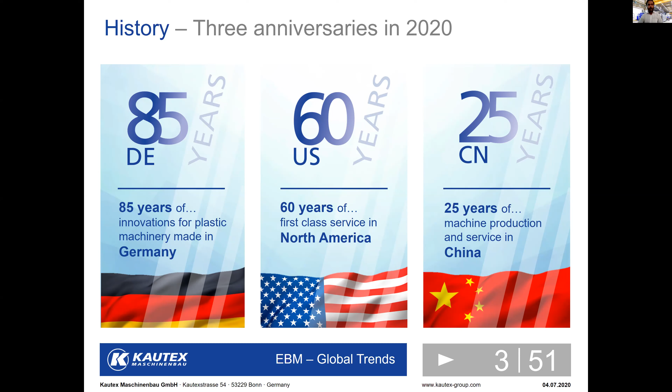The latest with Kautex is that now we are owned by a family called the Neumann family. This is also the same family which owns a lot of other plastic processing companies, including Engel injection molding machines.

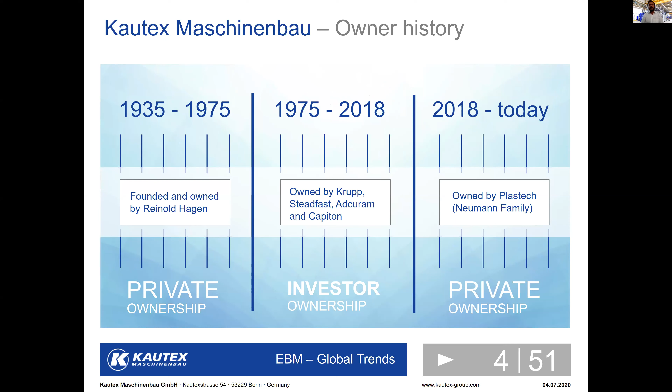In terms of presence, we are a German company based out of Bonn, with manufacturing facilities in Germany and China, plus subsidiaries all across. The slide you see right now only talks about the Kautex fully owned subsidiaries. In India, we are present since 2014, based out of Bangalore, and we take care of sales and service of machines for the Indian market, plus Sri Lanka and neighboring countries.

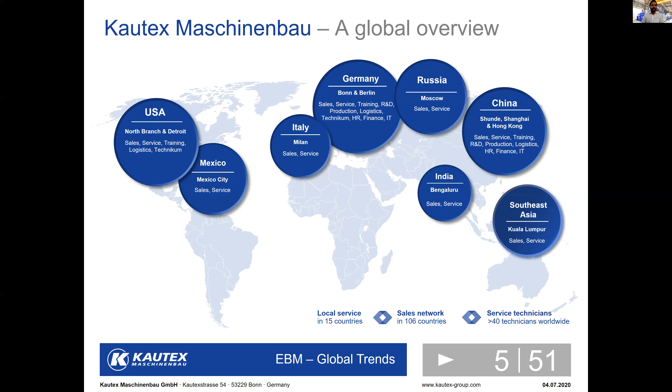So let's go to the main part of the presentation where we touch upon the different market applications. We have segmented the market into 4 major areas: packaging and non-packaging. In packaging, we have industrial and consumer packaging. Consumer packaging covers smaller products, let's say below 50 liters, while industrial packaging covers bigger items like L-ring drums and IBCs. For non-packaging applications, we have 2 segments: specialties and automotive.

Automotive used to be our bread and butter. We sold a lot of machines for plastic fuel tanks and other automotive parts. Specialties are the segments not really included in any of the other 3 segments, like composite cylinders, toys, and some special applications like garden houses and boats. These are segmented into the specialty business.

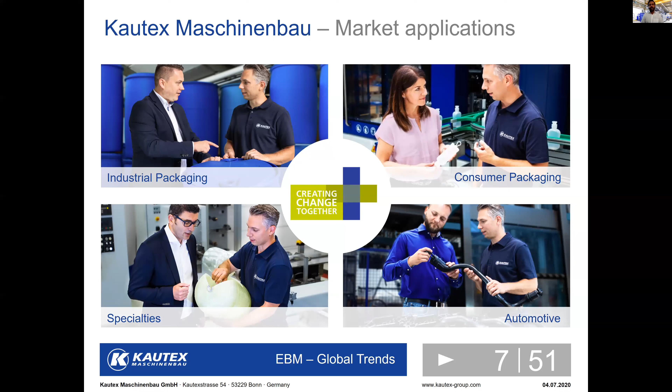So let's first touch upon the consumer packaging area. Like I mentioned, this is one of the fastest growing markets. Also, this is not a market mainly affected by the coronavirus and the downturn—this industry still continues to do good. The only problem we are facing with this industry in India is the shortage of manpower. But apart from that, the order books of most of these processing companies are full.

So the different sub-segments in this area would be packaging for detergents, the FMCG industry, lube oil, food, and pharmaceutical industries. And the main end users include Unilever, Reckitt Benckiser, Henkel.

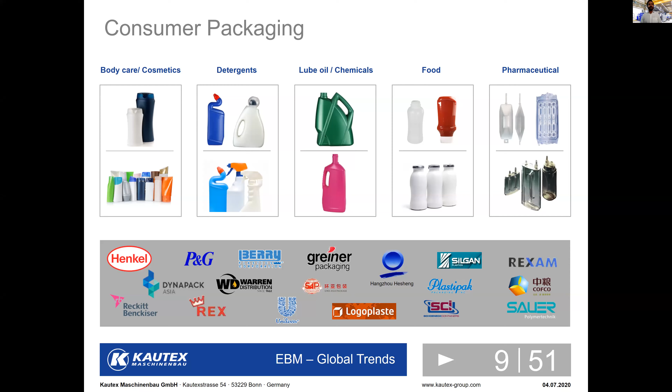So when it comes to packaging, what are the main drivers? The market is getting global. The number of SKUs is increasing each day—there's a 200 ml pack, there's a 250, 300, 400, n number of packs—the consumer is spoiled for choices.

The time to market is really short—the end user designs something and next day wants it in the market. There's a wide variety of product; even lube oil from Castrol itself has so many different variations, so it's really difficult, since all these SKUs have to differentiate one from the other.

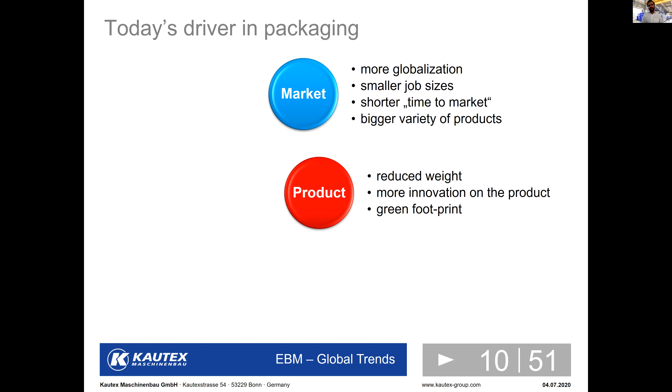If you look at the product in general, there is a demand for reducing the weight, and a demand for a greener footprint, reducing the carbon footprint.

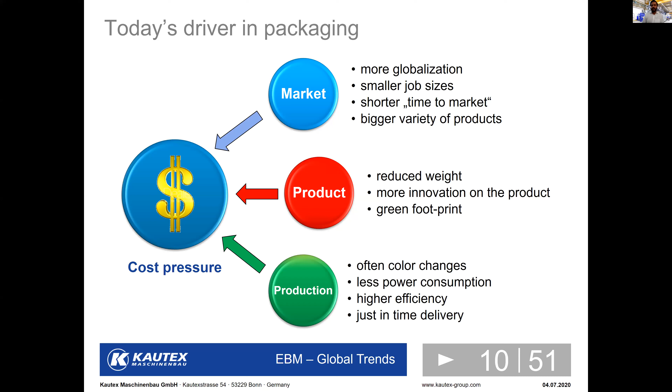And of course, when it comes to production, there are different challenges a processor faces: frequent color changes, energy consumption has to be less, the machine has to run 24 hours out of 24 hours, just-in-time delivery. So there is a lot of pressure on the processor because of these new challenges.

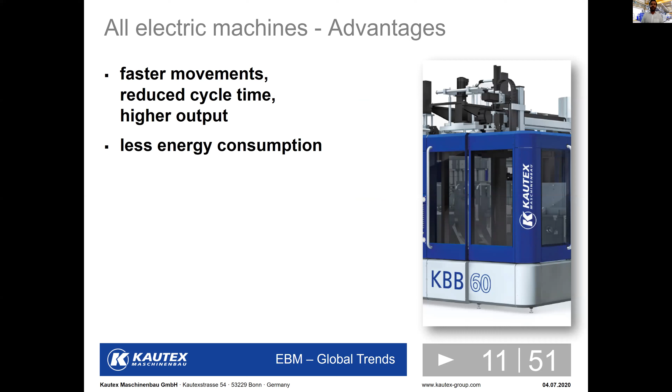So as a machine manufacturer, how do we address that? Of course, like in injection molding, extrusion blow molding is also moving gradually towards electric machines, which are faster, give you more precise movement, and higher output. The energy consumption is much lesser.

Repeatability is better because of more precise movements, and you can start up these machines faster. There is no waiting for hydraulic oil to warm up, you can just switch on the machine. And electric things, electric machines, electric cars, everything is cleaner than a hydraulic machine or similar product.

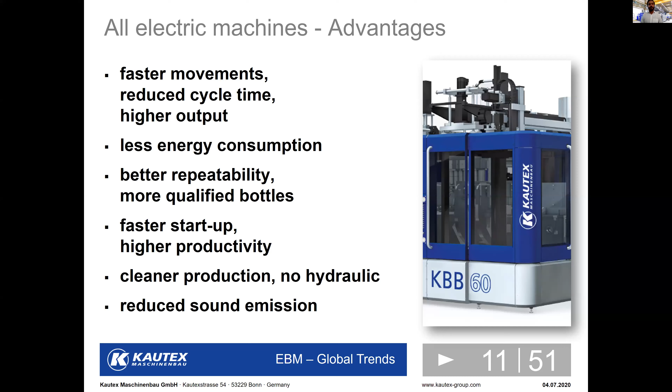And of course, you hardly hear these machines running. So if you talk about only the energy saving, just on the movement side, because if you look at things like heating, extruder running, irrespective of whether it's an electric or hydraulic machine, it consumes the same. It's only in the movement of these machines that electric machines save energy. What we see is, if you compare a new generation electric machine with a new generation hydraulic machine, we still see a 40 to 42% savings only on the movement of the machine.

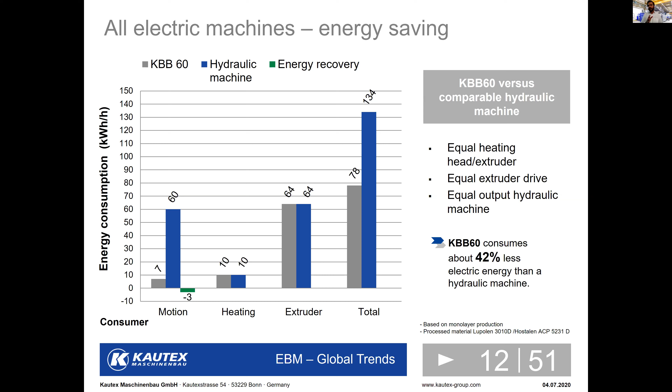But then, a good electric machine is only one part of it. It is not complete unless you have a good mold, a high quality mold.

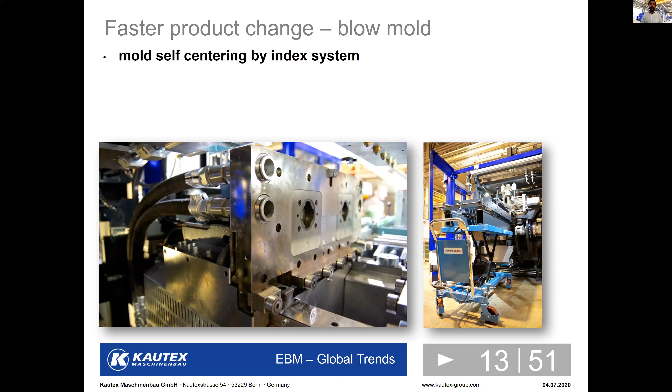Because of the flexibility you need, you really need faster mold changeover times. So we also have solutions wherein we can give you faster mold changeover times, mold changeover in less than 15 to 20 minutes. And if you are fully equipped, we can also target a mold change in 10 minutes. Mold change with quick connect couplings, blow pins with quick connect couplings, head changeover - because it does not make sense to have two machines for two different products if you can accommodate everything in one single machine by changing the head. So customers are also looking at this kind of flexibility wherein they have one machine and different kinds of heads, like different kinds of molds.

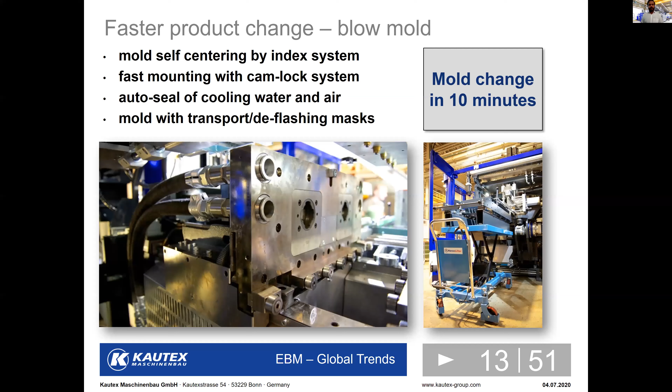That's one part. Now we have to look at the downstream. The major problem that processing companies are facing right now is the lack of manpower, so automation is something we really have to look at eagerly.

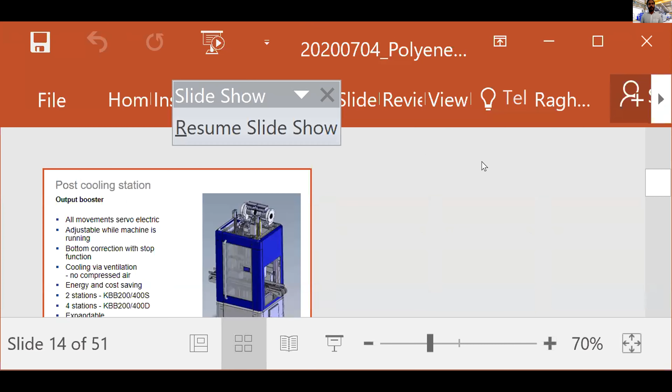Sorry, is my screen visible? Yes, yes, okay. I got a message that the screen sharing is paused, so I was wondering. The letters are actually small. Pardon me? The letters are small, and your screen is not in slideshow mode. Probably you have to put it in a slideshow to move forward. Okay, let me check that. Do you see the screen now? Now it's okay. Oh, okay, perfect.

Good, so I was talking about the downstream equipment along with the machine - it's also very important. One of the major time-consuming factors when it comes to blow molding or injection molding is the cooling. This directly affects the cycle time. But if you're talking about jerry cans and similar products, these can also be cooled outside the machine - you don't really have to use machine time for cooling.

So post-cooling stations are now getting integrated with the machine - you have the possibility of integrating it with the machine. At the same time, these are also plug and play systems, so you can use it for one machine, and if you don't need it on that machine, you can just slide it and fix it on the next machine. You can also use it for bottom correction, which is very critical for stackable jerry cans. This can be used for double station or single station machines based on your machine output, and you can increase the number based on what the output of the machine is.

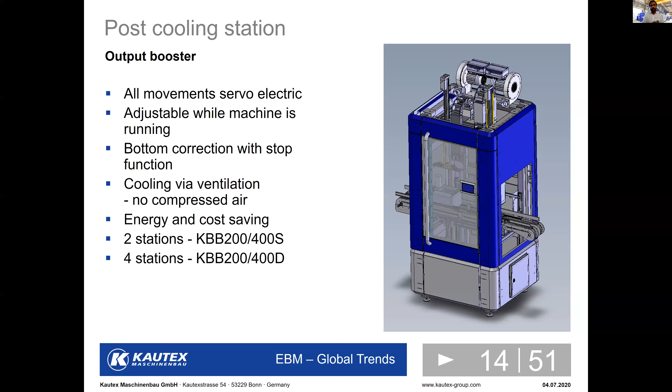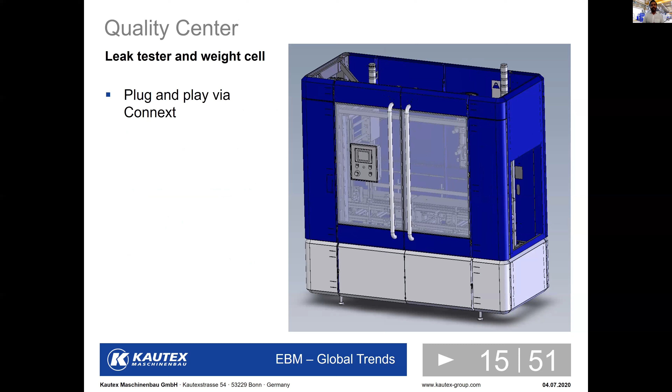Next is the quality center. You have to make sure that the bottles coming out of the machine are 100% tested. So what we have is a leak tester integrated with a weighing machine, which can be directly controlled by the machine control panel. The parts which are in tolerance are pushed onto the next station, whereas parts which are out of tolerance are removed then and there.

Another thing is post labeling - you cannot have manual labor just checking if each and every label is clearly placed, if the neck dimensions are fine, if the ovality is fine. So we can also have a Spotwatcher, wherein we have different cameras or a single camera which can move around the part and take pictures and images to check if the entire product is within tolerance as defined by the end user.

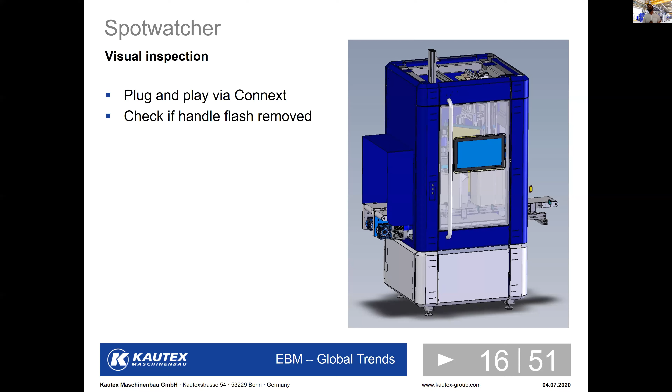So with these plug and play downstream equipments, we are totally removing any kind of manual intervention. This can go on up to fully packing - you can have a separate packaging line, so there is no manual intervention anywhere. And we have seen, with a single operator, you can run 4 to 5 machines on the shop floor.

So that's on the machinery part of it. Now let's talk about the processing aspect.

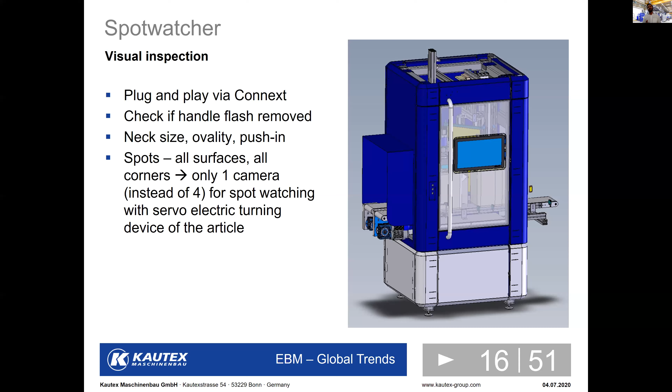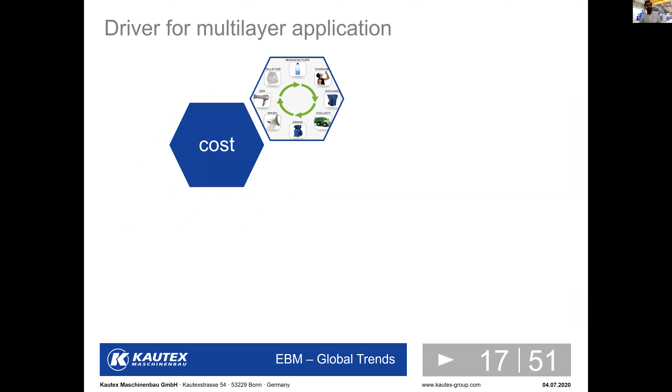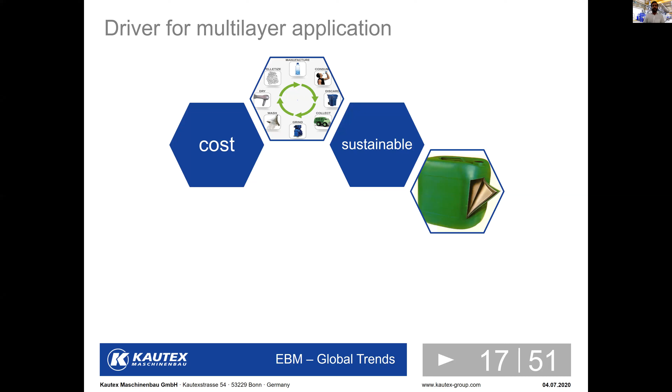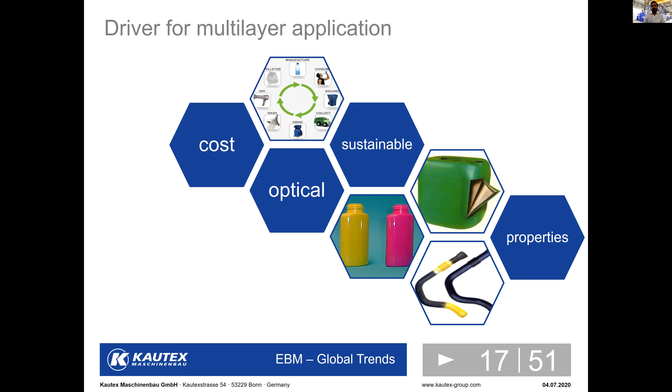In the processing aspect also, we have new technologies evolving. Multi-layer is something which was there in the market since long, and now it's slowly getting more and more acceptance because it's saving cost, it's sustainable, it improves the properties of your product. At the same time, it also improves the visual appearance and feel of the product. So I just want to touch upon these aspects, how we are able to do this, and of course the barrier properties also.

So your product, which is inside, let's say milk or any colored fluid, is not really affected by the master batch that we are using. You have the middle layer where you use the regrind, and you have the outermost layer where you're just adding the master batch.

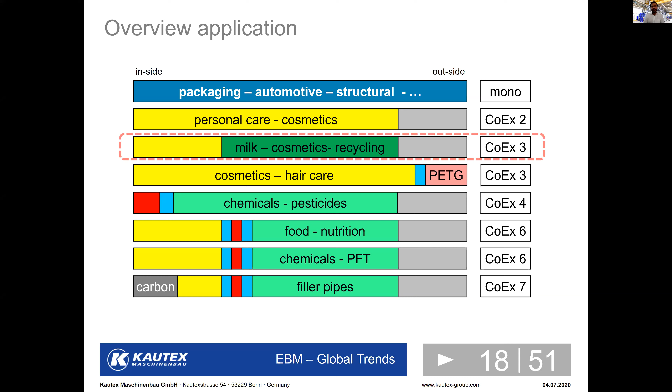So here in the middle layer, like I mentioned, you can either use your PCR material, which is gaining more and more prominence right now. A lot of companies are investing heavily in this PCR to make the bottle more green and to improve the UV properties. There's another added advantage that we can use this middle layer for something called foaming, which is chemical foaming or physical foaming. The main target is to reduce the weight here.

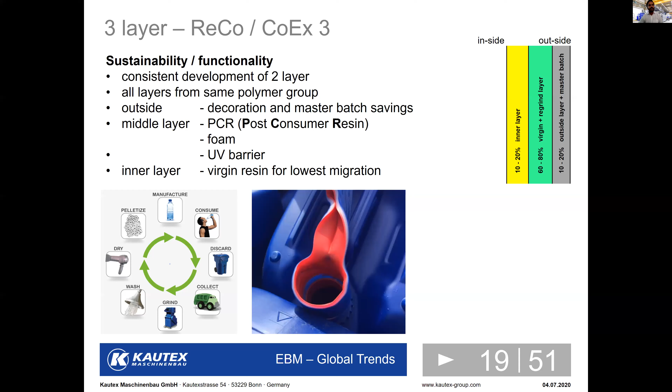An example - let's look at a three-layer milk bottle, wherein the outside layer is HDPE plus white master batch, the middle layer is HDPE with carbon for UV protection, and the innermost layer is your virgin HDPE, which has the lowest migration.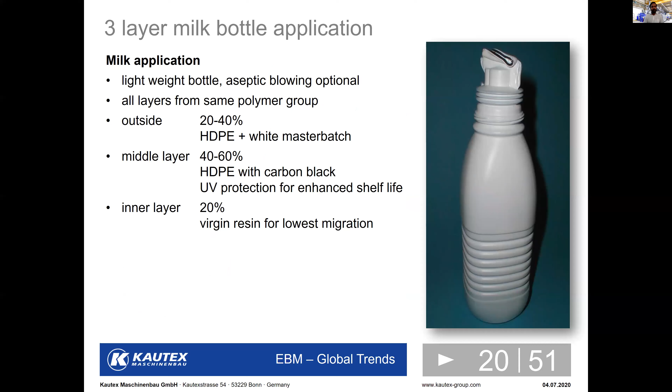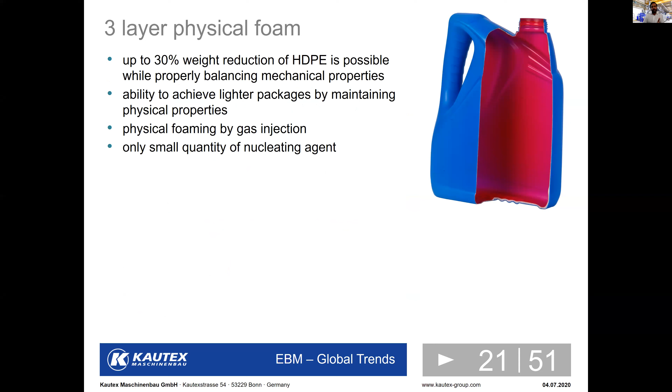If you look at the foaming structure, physical foaming is something which is getting more and more prominence nowadays, wherein we use the middle structure for foaming. In this case, what we use is a nucleating agent and a gas, which is either carbon dioxide or nitrogen. We pump this into the middle layer and create a foam-like structure. The main advantage here is that you have a possibility of reducing the weight of the product without actually impacting the physical properties, or you can keep the same weight with better physical properties, with better top load and all. So this is something definitely gaining more and more traction in the market.

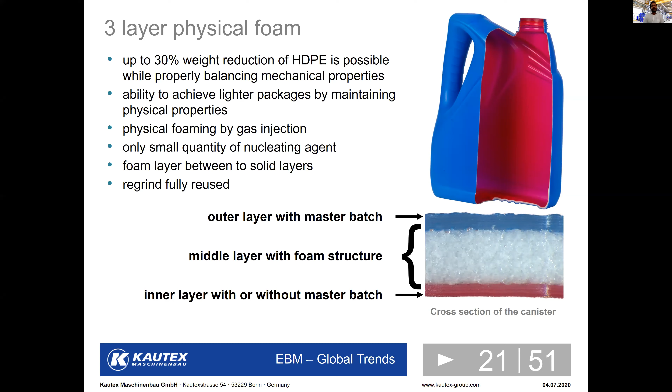Now, next, with the 3-layer structure, what we see is the savings that the processor has. So let's give an example of a 20-liter jerry can, whose gross weight - that is the weight including flash, everything - is around 1.2 kg. We have a cycle time of around 30 seconds and an output of 151 kg.

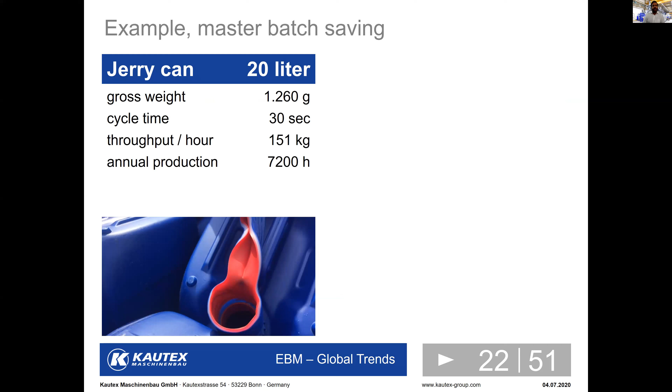Now, if we're using a master batch here, let's compare it from a mono layer to a 3-layer. In a 3-layer structure, we are only using master batch in the outermost layer, that is 20% of your thickness. So master batch consumption is only 1.5% in mono layer, but it increases to 3%. It's only a percentage increase, because instead of coloring the entire thickness, you're only coloring a small portion. So you have to put an extra dosage of master batch percentage-wise, but the actual consumption of master batch is much lesser.

This figure varies from processor to processor depending upon the cost of master batch you're using and the kind of product you're manufacturing. But if you take an example of a master batch which costs around €6, which is a fairly high quality master batch, you can easily be looking at a cost saving of around 50,000 to 60,000 euros in a year by moving to a 3-layer structure.

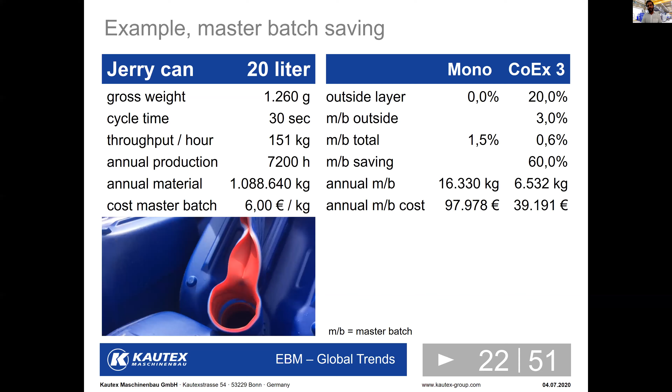We also have to make sure the machine is actually running at full efficiency, with no downtime when it comes to color change or head change. That's an area Kautex is investing heavily in, with a lot of R&D happening right now. Faster color change with our new generation head has been successfully achieved.

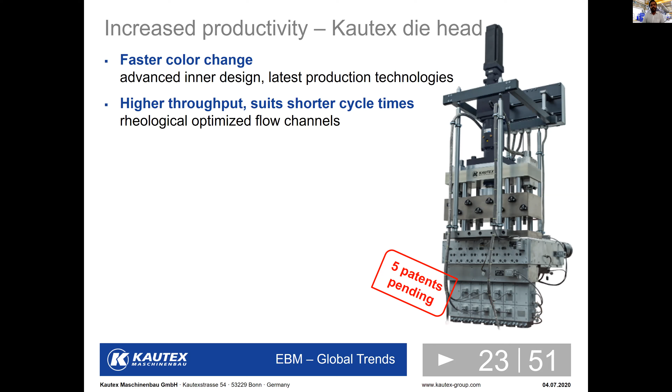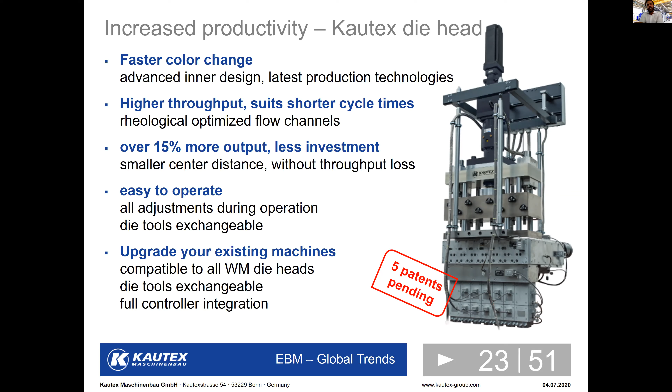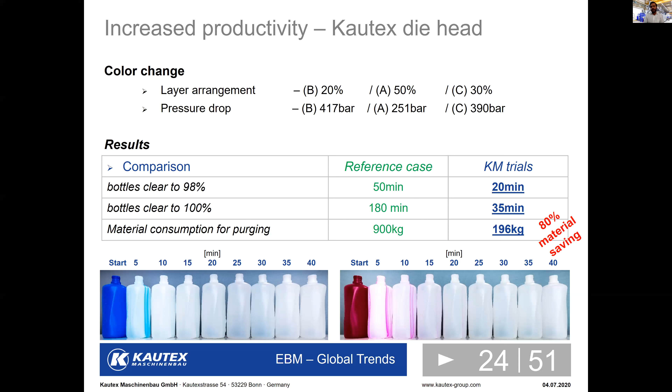More and more plastics being used, people want to try these green plastics made from non-petroleum sources. That's gaining more and more acceptance in the market. A lot of end users are trying to project themselves as more green by using these green polymers. These are slightly more expensive compared to standard plastic, but the processors, end users, and material manufacturers are working out how to make this PCR more affordable and how to make these bottles more green.

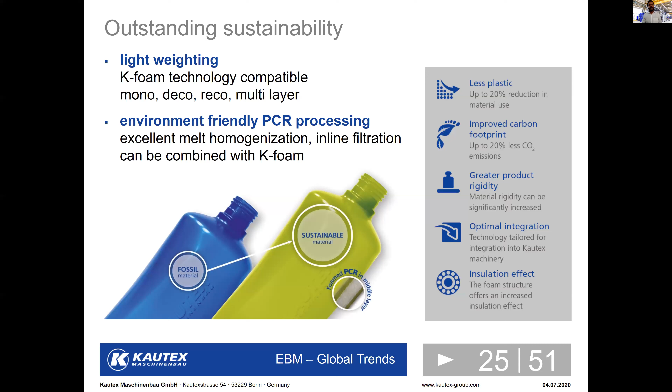There is a major impact of IT and communication on these machines. We have to make sure the machines are running, with no downtime, online all the time, so we can actually give recommendations on when you need to do any modifications, or if there are any spare parts which you need to keep in stock.

At the same time, you have something called virtual machines, wherein you don't have to stop the machine for any kind of training. You have these virtual machines with the same HMI as the machine, but the machine image is projected on a wall or screen, and you can actually do all the parameter settings. This lets you see if the machine is working well, or if there are any shorts, issues, or processing problems, so you can get a feel of all these aspects.

Whenever you get a machine first, it's always better to have your team spend some time on this HMI so they know what they're going to get and how the functions work, because each manufacturer has their own HMI. The basic logic is the same, but it always takes some time to get acquainted with the product.

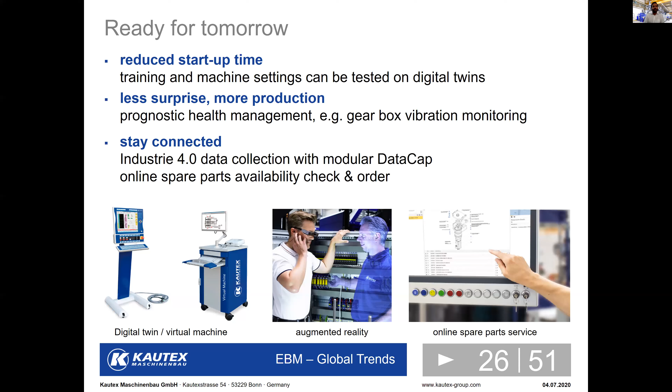The second aspect of packaging we'd like to touch upon is industrial packaging. Generally, what we mentioned for consumer packaging is more or less also applicable for the industrial packaging segment. So when I say industrial packaging, we're looking at stackable jerry cans, bigger jerry cans, polycarbonate bottles, L-ring drums, and IBCs.

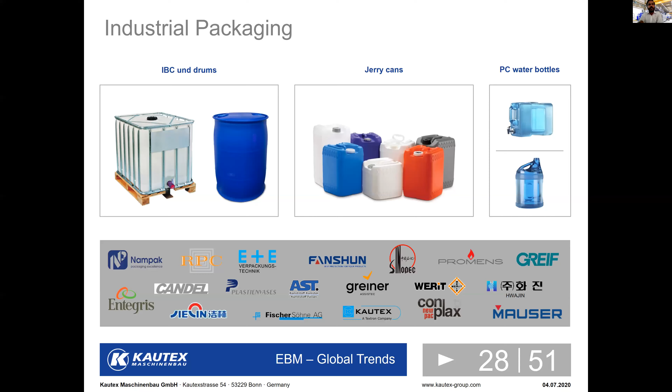Let's take an example of the L-ring drum. We have a lot of machines working in India and across the world for L-ring drums. If I take a standard case, a UN approved L-ring drum of around 8.5 kg, we used to get an output of around 20 plus drums an hour. But now, with constant demand from the market for high output and constant reworking on the machine, we're now confident of producing around 53 drums an hour at 8.5 kg weight. If you reduce the weight, the output varies.

If you're increasing the weight, the output goes down. This is achieved by having machines with lower dry cycle time and a head that gives very high output. Interestingly, we're moving away from accumulator technology and going more with continuous extrusion, which also means a lot of power savings on the machine compared to accumulator technology.

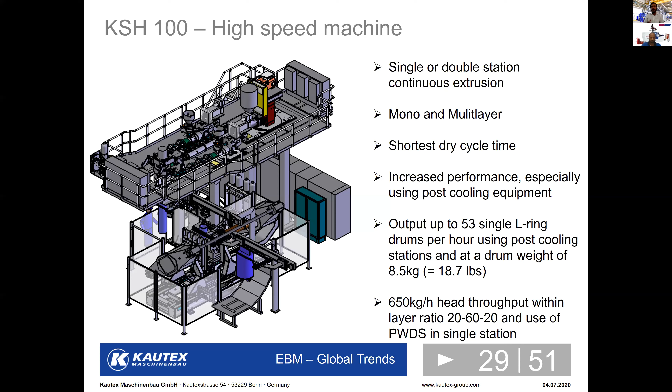Here also we are looking at different kinds of configurations, whereas we have a monolayer machine. This can also be 2-layer, 3-layer, or beyond that. But what we see is the market requires more of a 3-layer structure when it comes to L-ring drums.

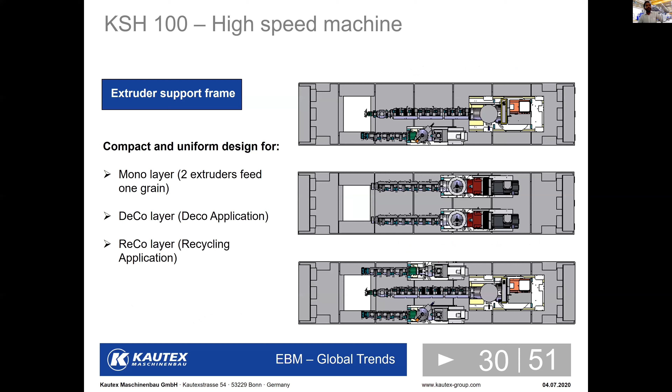So like I mentioned, the head is very important here when it comes to continuous extrusion. And with our new generation head, we are looking at an output of around 650 kg per hour in mono or 3-layer applications.

And the color change-over time is also very critical. What we are looking at is around 2 hours to change, in this case for the bigger machines, from one color to another.

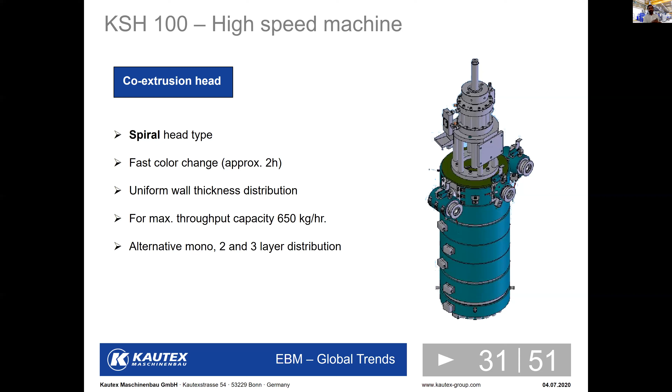A lot of downstream equipment is also needed here. So one of the critical points we would like to highlight is the plasma technology, wherein we give a coating of plasma on the inner layer, basically to improve the barrier properties.

So this was something which was already used in the PET market, but for the first time, since last K, it's also getting used in the extrusion blow molding segment. So plasma coating is coming up as a big alternative for multi-layer structures.

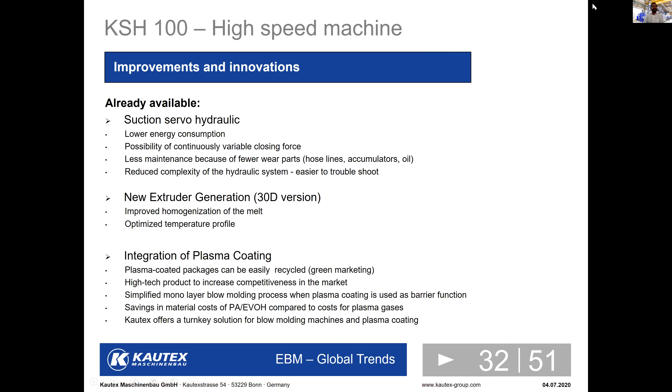We don't want to use the machine for cooling the product, because the machine is there to produce the product, and cooling can be done using the post cooling stations.

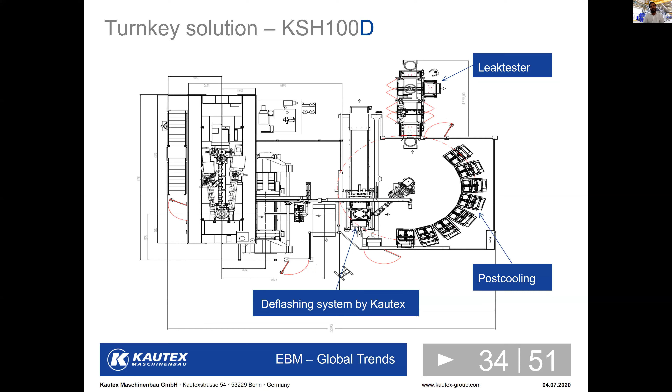Now, if you're looking at a double station machine, for customers who need even further output, we also have the possibility of making it a double station machine to further increase output. Accordingly, all your features like the post cooling station, leak testing, and deflashing station will have to be modified. But if you're looking at really high output, then that is also practical right now.

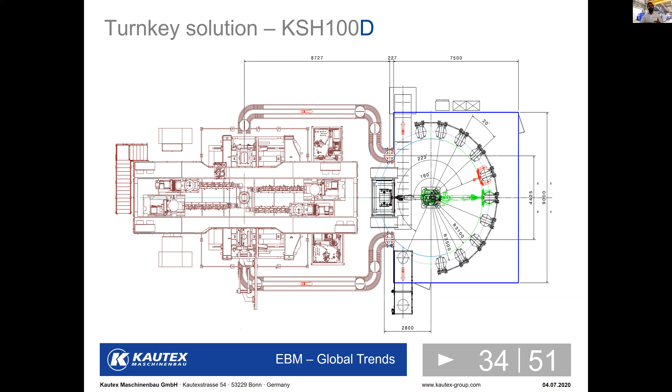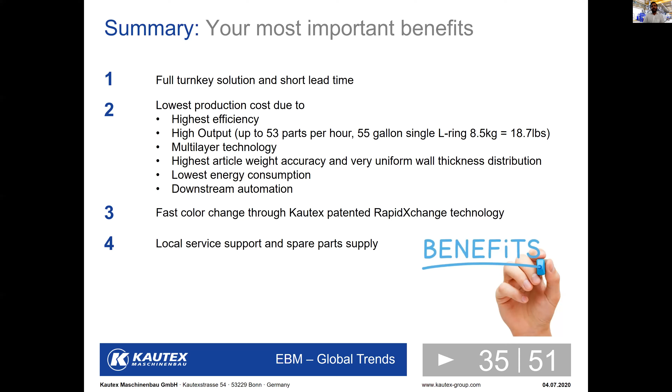So to summarize for these big machines, what we are looking at is very high efficiency, high output, different kinds of layer configurations—so multi-layer—and high article weight accuracy. At the same time, as we are moving towards direct extrusion, we are also looking at low energy consumption and downstream automation. So the last two segments we have here are automotive and specialties.

I would just briefly touch upon these two segments. So when I say automotive, there are two sub-segments. Let's say in automotive, we have the motor management functional components, that is the non-fuel parts, and then we have the fuel parts.

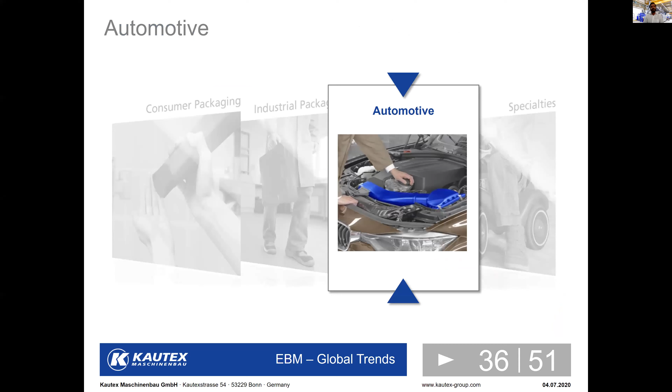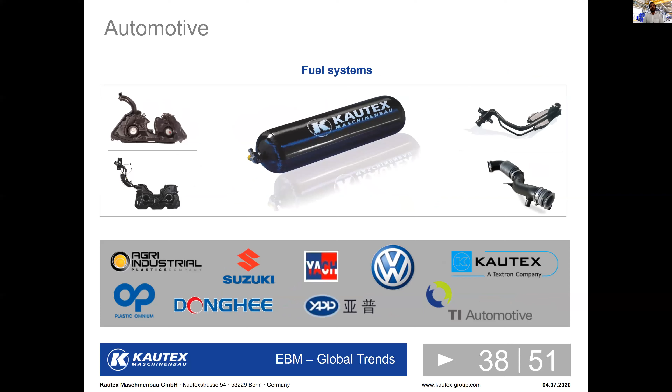The fuel systems include your petrol tank, diesel tanks, your CNG tanks, and your filler pipes—that is the connection between the petrol tank and your fuel inlet. So what we see here is a trend towards...

use of blow molding for type 4 applications. So when I say type 4 applications, we have a plastic core which is wrapped using fiberglass or carbon fiber. In this case, what we see is CNG as a typical example, wherein we have this HDPE core.

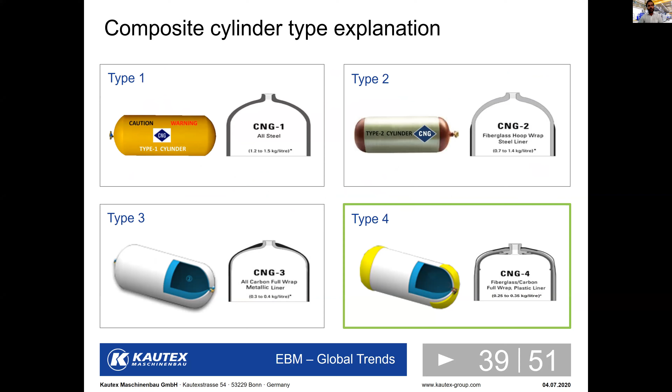A blow molded HDPE part, and you have a carbon fiber filament winding which gives the strength to the part. And with this product, we are actually achieving a burst pressure of around 700 bar.

And the test pressure is usually around 500 bar. If you look at the working pressure, this is around 250 bar. So this kind of high pressure requirement is now met by this product called CPV, which is called composite pressure vessels.

This is getting more and more acceptance because now mobility is moving towards electric, but at the same time, there are also a lot of companies and end users who are looking at CNG for their bigger vehicles, and they are looking at hydrogen for their smaller passenger vehicles.

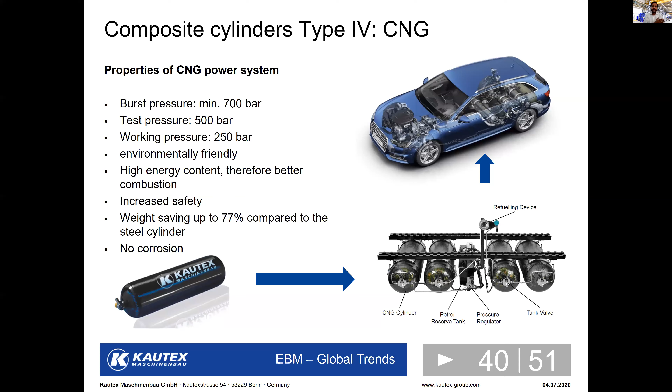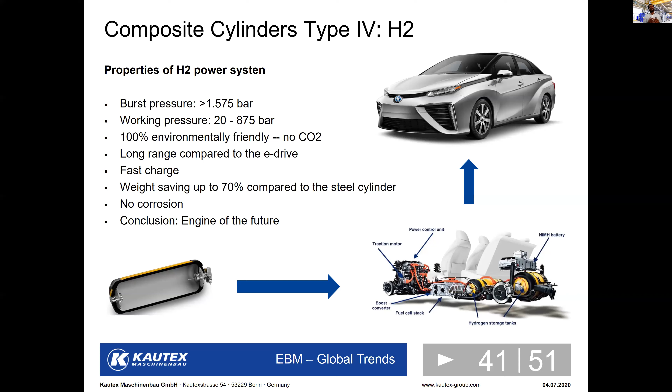The main advantage with these products is, of course, the life. We don't have problems like corrosion, and at the same time, you're looking at a much lower weight compared to steel cylinders.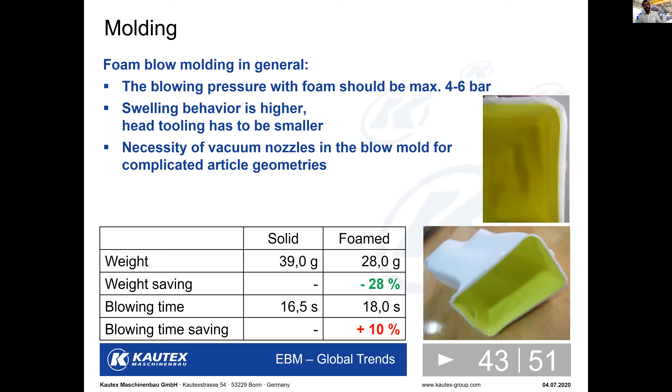The last segment I'd like to touch upon is specialties. Here we have products like pallets, garden houses, composite cylinders, big parts like kayaks almost 4 meters in length, which are now getting blow molded. So a lot of complicated products which were initially roto molded are moving towards blow molding as the consumption or output requirements are increasing.

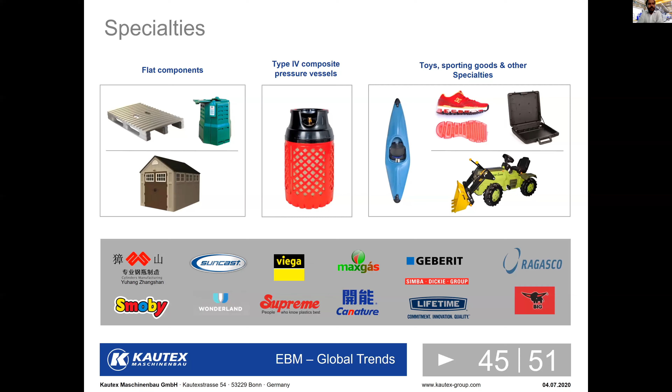Also products like shoe soles and toys are getting blow molded now. If you look at the LPG cylinder, which is also present in the Indian market but in comparatively lower numbers, this is also blow molded. The same concept mentioned for CNG and hydrogen cylinders is used for LPG. The advantages are that the weight of these cylinders is much lesser, they're easy to handle, and the life, because there is no corrosion, is much longer compared to a steel cylinder.

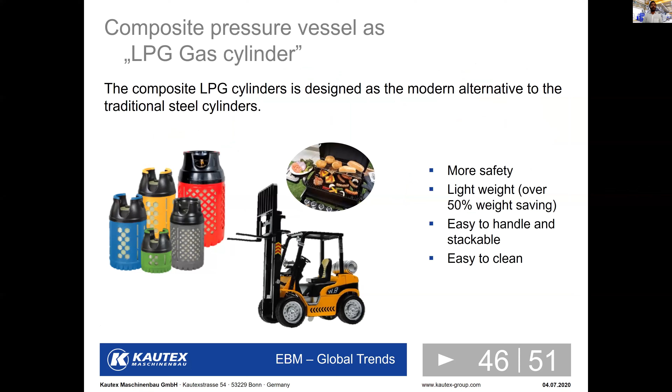If you look at the components of a composite pressure vessel, we have the polymer, the parts that have to be welded, and the fiber. In this case, we make the blow molded part out of HDPE. We use filament winding technology for winding the fiber across the part, and this entire assembly goes into an injection molded case, mainly for aesthetics and handling purposes.

So basically this is what we are doing in different segments of the market.

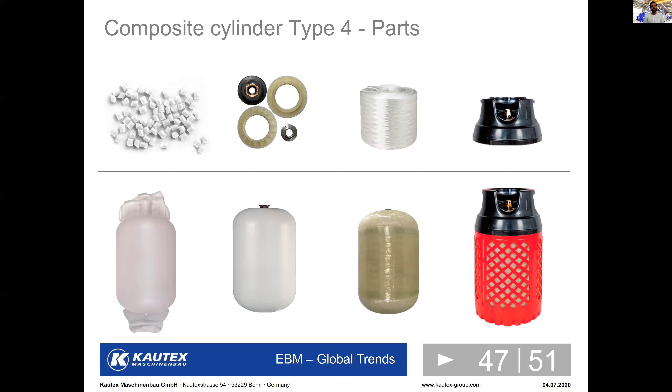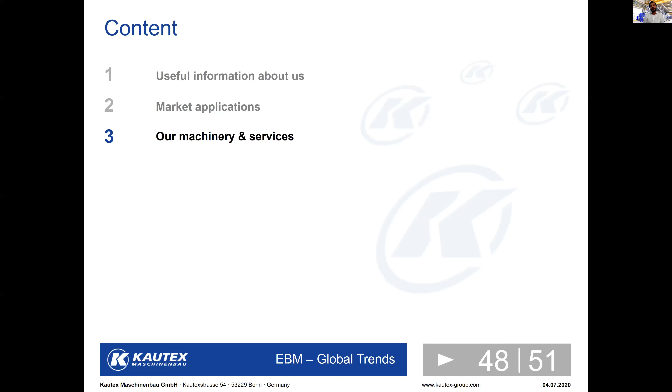Now just have a look at what Kautex's machinery base is. We have around 6,500 machines working in the market for these different kinds of applications. More and more machines are now electric machines, and more and more are now multi-layer machines.

When it comes to fuel tanks, there has been a dip in machine sales since 2019, because more and more people are talking about electric vehicles and new generation cars. So electric vehicle numbers are shooting up, and at the same time, end users are also looking at products like hydrogen and CNG, which seem to be more practical and viable options.

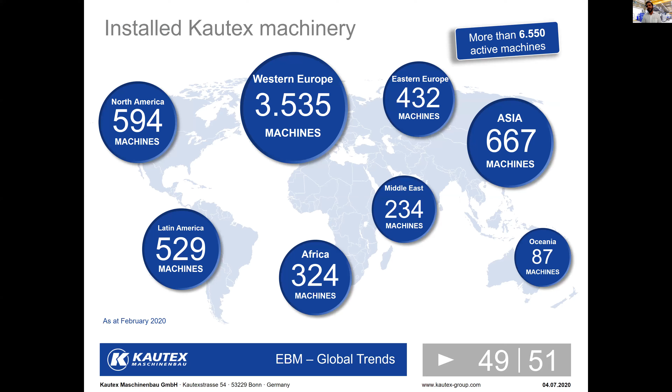Machinery is, of course, our bread and butter, but we also make sure we help with all kinds of retrofits. So if you want to upgrade an existing machine, or modify another brand's machine, we help you with that, including any kind of development. For example, if you're planning to enter the LPG market, there are many regulations and approvals required, and a lot of development activity needed. So we try to give you a turnkey solution wherein we take full responsibility for the product.

At the same time, when it comes to an FMCG market where the end user wants to launch something new, we also help you with product simulation, line simulation, how to optimize the article, and how to optimize energy consumption. So basically, this is what I compiled for this seminar.